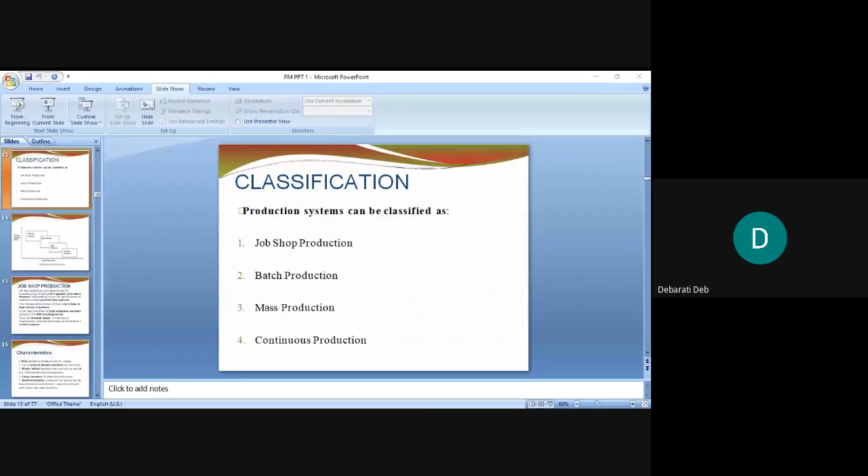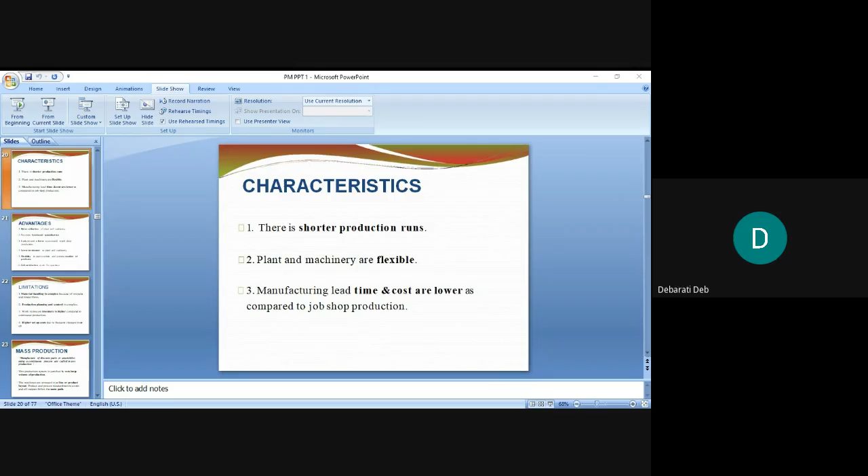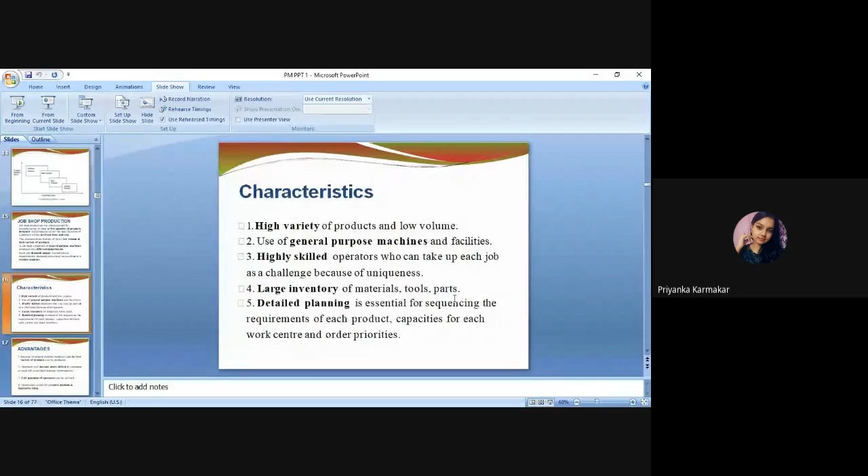Good morning. So, what was our last topic? Can anyone tell me? What was the last topic taught? Priyanka, what was the last topic? Ma'am, I think characteristics were done. Characteristics of batch or job? Ma'am, batch. Batch was done, I think.

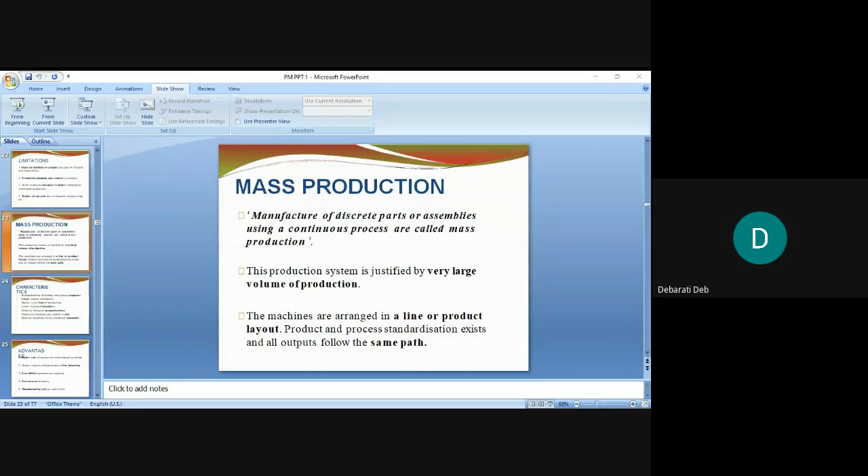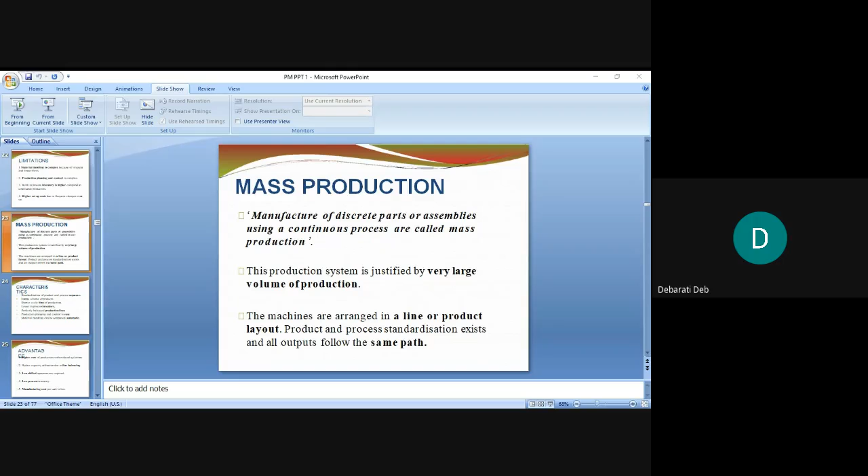Okay. All right. So, four types of production I told you that are basically there, and we will carry on with our discussion. We started with job and we also did batch. So today we will study what is mass and continuous production. So let us start without wasting any time. I have already wasted some time. I was late, I'm sorry. Okay, so let us quickly study what is mass production system.

The manufacture of discrete parts or assemblies using a continuous process is called mass production. This production system is justified by very large volume of production. The machines are arranged in a line or product layout. Product and process standardization exists, and all outputs follow the same path. Say, for example, manufacturing of the railway tracks. So, this will happen in a very large volume, right? You cannot set up a manufacturing department and produce all the railway tracks out there.

You cannot do that. Also, you were not there at that time when this Killian Hall was developed. Before that, I don't know whether you have seen our college or not. It was a vacant place with a basketball court and a few trees, and sand and all this. And when the production was going on, it moved on a very large scale, for a very long period of time, and equipment was brought into our own campus, and it was all a mess. I think for one full semester it went on, during the year 2018. So in that time it happened.

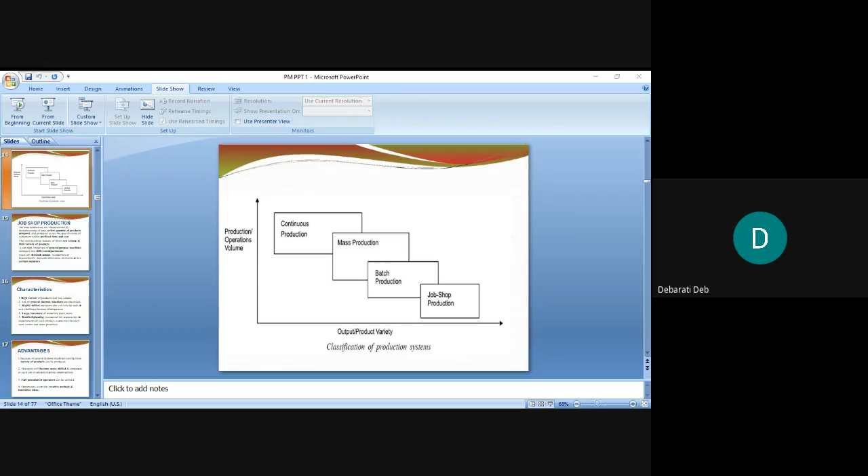So it is a mass volume of production. You cannot set up a single location and go on manufacturing certain equipment out there. You need a full setup for this. The way the machines are set up is called a line or product layout. We also have chapters related to different production layouts; we will discuss them in detail in those chapters. So here what happens is, not according to demand, but according to the proper process of production of that particular product, the entire layout is set.

The entire machines are arranged in such a way that the product follows a particular path, and it will follow the same path only. Whatever standardization you make, the product will go through the same path. You cannot change that path. Production of railway tracks: all the tracks will be the same type of output, isn't it? So they will go on following the same path, and they will happen in a very large volume. And whether you manufacture or assemble, you will have to do it in a continuous process, with a very large volume.

Say manufacture of cars, trucks, all those things will fall under mass production. Why? In car manufacturing also it goes on a very large scale, and there is a continuous process, isn't it? The machines will be set up in a single path, and the products will follow that singular path and reach their output level, and all the outputs will follow the same path. Okay, that is mass production.

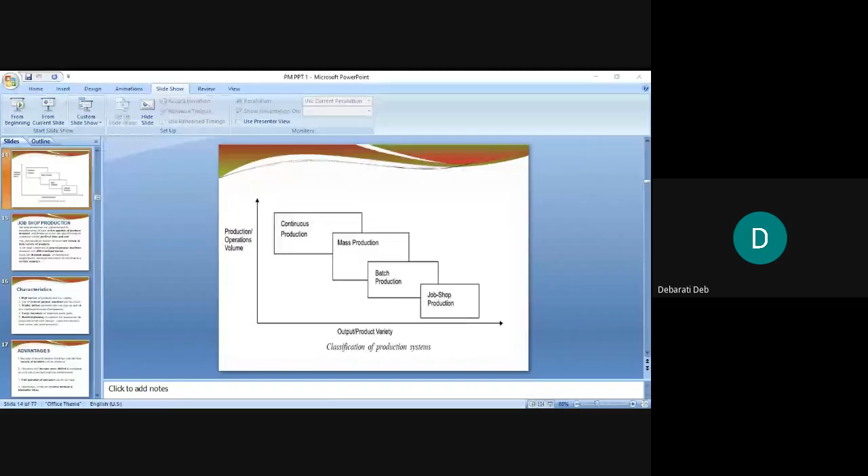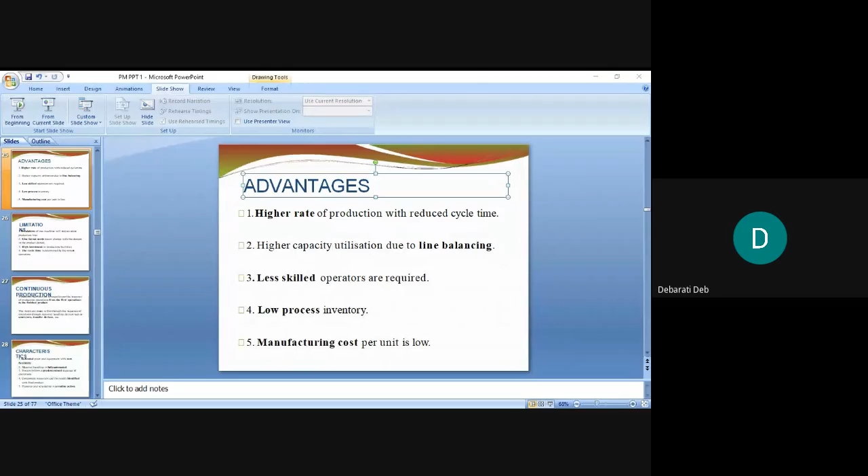Then low process inventory, already discussed. Then manufacturing cost per unit is low, because you are utilizing the same machines, using the same materials, so manufacturing costs are also going to be low if you go by per unit cost.

Okay. Then limitations. Suppose there is a breakdown in one machine. What will happen? The entire flow will stop, because that machine is connected to all the other machines since you're following the same path, isn't it? So breakdown of one machine will bring a breakdown in the entire production process.

Then line layout needs major change with changes in the product design. Suppose the design of the car is becoming obsolete, no one is buying that design, so will you still go on producing the same type of car? No, obviously not. You will go with the trend, what is going on in the market, what the people are liking. So you will follow that trend, or you will create your own trend, right?

So in that case, if it happens, then you will have to change the entire layout. It may happen that you have to replace all the heavy duty machineries which are highly priced. Then in that case, there will be major changes, isn't it? And if there are major changes, obviously there will be higher incurring of cost, isn't it?

Then high investment in production facilities. As I told you, the machines will be heavy duty, they will be doing a lot of work. In that case, heavy investment is also required, isn't it?

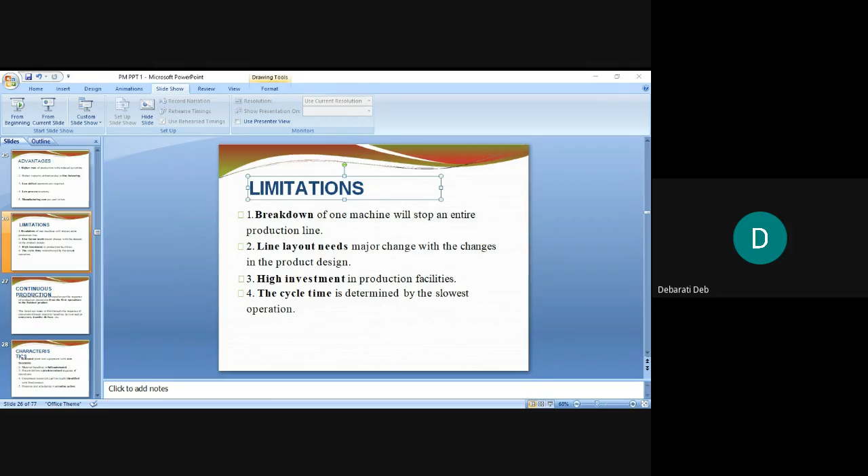And the cycle time is determined by the slowest operation. So the cycle time, that means the time required for the product to get manufactured, will be determined by the slowest operation. Why is it so? Because it is a continuous process; every time it is doing the same thing.

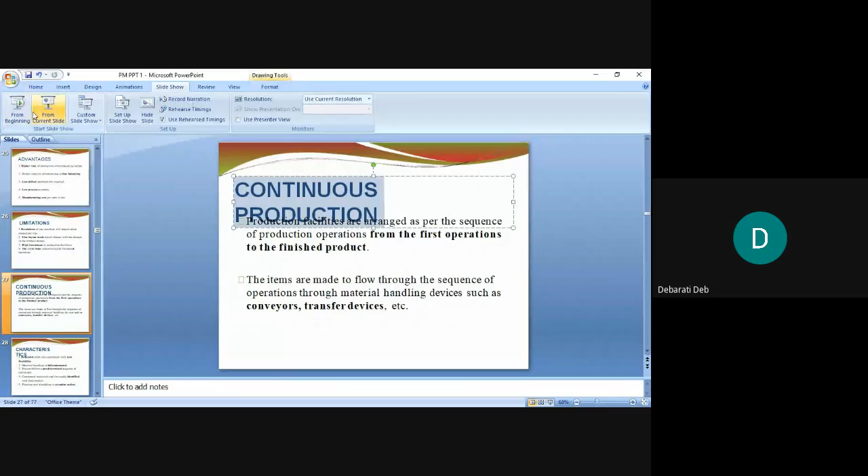In that case, the operator's process also becomes slow. Sometimes boredom occurs, sometimes breakdown. If there is a breakdown, the entire day the production will not go. Due to that, it gets characterized by the slowest operations.

Okay, any doubt in mass production? Is there any doubt in mass production? No, ma'am. Okay, then let me move ahead to continuous production.

In continuous production, the production facilities are arranged as per the sequence of production operations from the first operation to the finished product.

From the first operations to the finished product, items are made to flow through the sequence of operations through material handling devices such as conveyors, transfer devices, etc. There is a similarity between mass and continuous production, in the sense that in continuous production also the items are made to flow through a sequence of operations. Now everything will be automatized.

For example, if you travel in flight, you can see that the system is completely standardized, isn't it? The flight will land, the travelers will be escorted to a bus if the lounges are quite far away. Then you will come to the lounge, spend some time, and wait for your luggage. The luggage will be automatically carried by the conveyor belts and delivered to the travelers. Then you can fetch your luggage and leave the airport. Everything is going on in a continuous flow, isn't it?

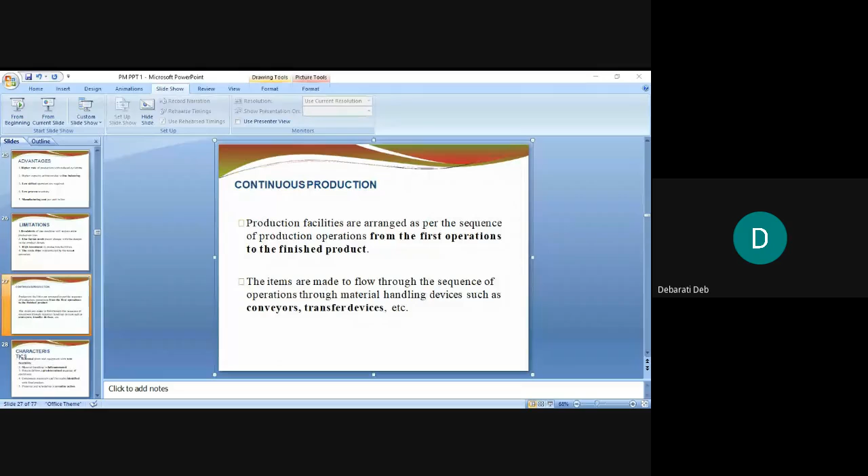First I'll teach you different types of layouts. By next week I'll finish off this part. Then I'll take you to a manufacturing unit. There you will have to do a project work. You will have to find out what type of layout this manufacturing unit is following, and what type of production it is. By now you have known 4 types of production.

What are the 4 types? Who will answer me? Tell me, what are the 4 types of production system that I have taught you till today? Mass production, batch production, continuous production, and the first one was what? I forgot that. Job. It is job production. So you go through it.

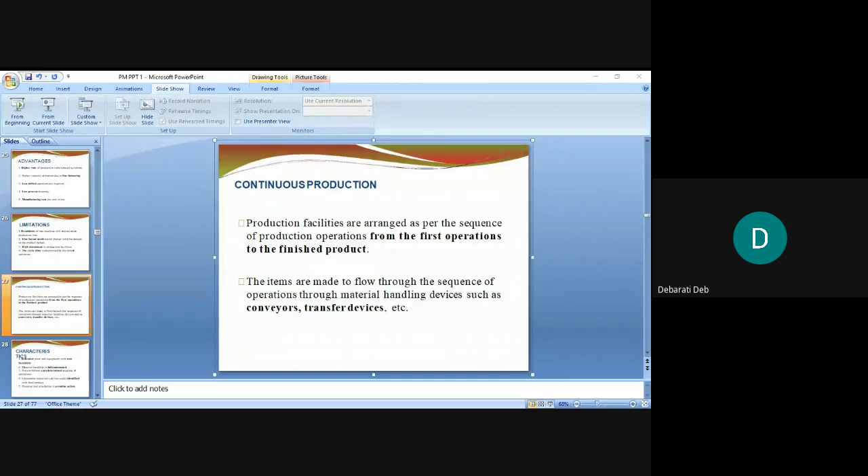This PPT is uploaded in Moodle. Please try to access that. Due to some technical reason this may not be appearing in your dashboard, but by now it should appear. So please have a look so that you can go through it. Also you can see some YouTube videos where these types of production are taught by different teachers.

There are some production unit examples; there is a very good video I will share with you someday. You also check, Amul ice creams. There is a production cycle video of Amul ice creams on YouTube. Do see that video. It's very interesting to see. When you see it in front of your eyes, it becomes more interesting. So I'm trying to take you to a production unit by the end of this month.

By that time we will finish off our discussion on layouts and the different production types, so that you can identify them. See, theory and practical are completely related. Practical cannot occur without theory, and theory is invalid without practical. So first you learn the theory. For 2 weeks we will learn only the theories.

In the 3rd or the 4th week, I'll take you to a manufacturing unit where you will see what is happening out there, how the process is going on. All right, so first you have to understand.

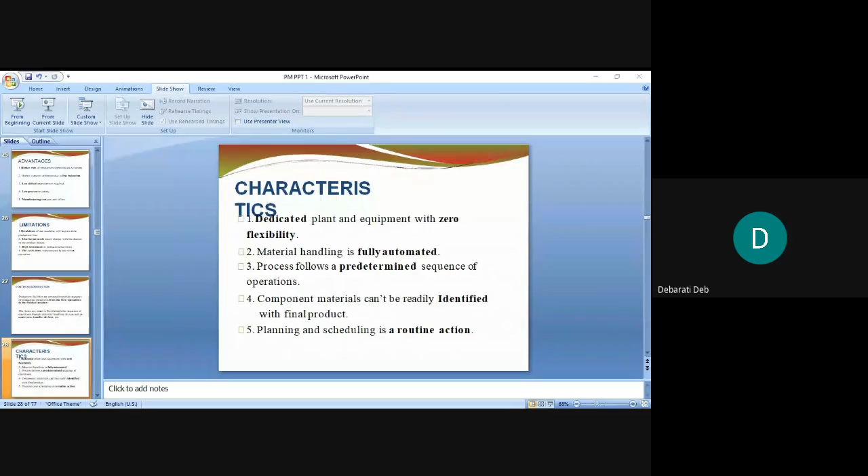As I told you, the bottles of Sprite will come in small 6-inch size. How will you identify this with a 750 ml Sprite bottle or 1.5 liter Sprite bottle? You cannot identify. The raw materials will come in such a form you will not be able to identify or relate it with the final product. Shape, size, color, everything will be changed in this continuous process. Since it is continuous, planning and scheduling has to be routine work. It's similar to mass production.

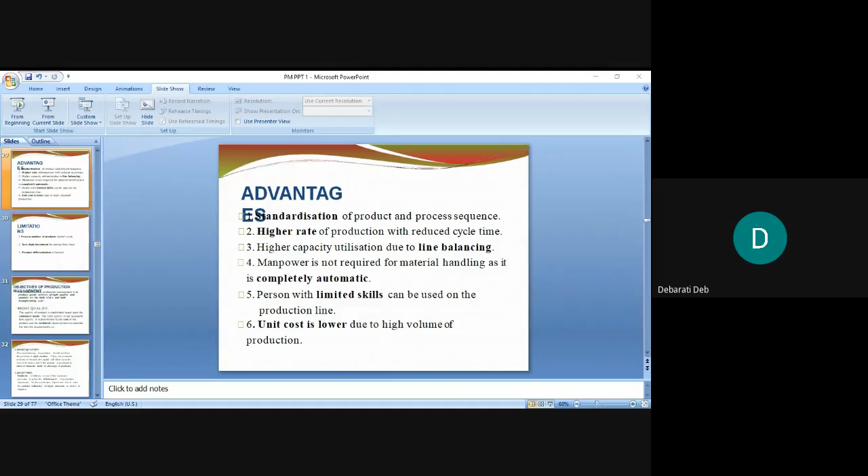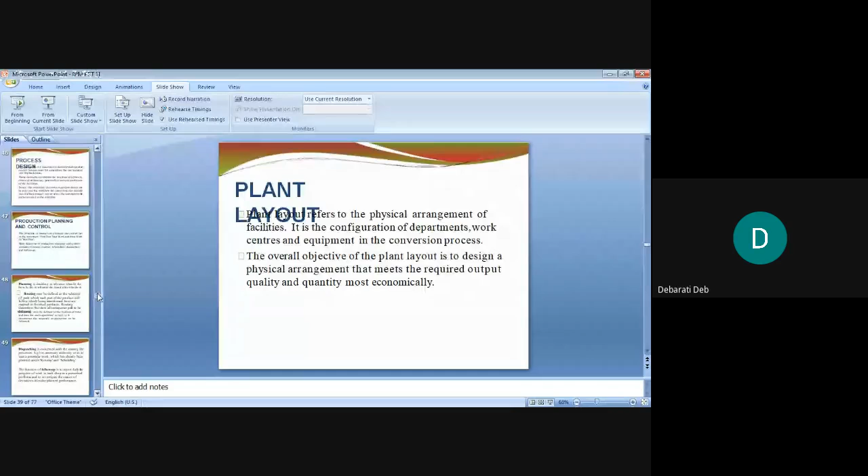Objectives and scope of production management you are going to study on your own. This is not much required. From tomorrow I'll start location of facilities and plant layout. Plant layout we will finish off by this week itself, so that we can study a little bit more about layouts and production process. After that we can visit a plant. So I'll not teach anymore today.